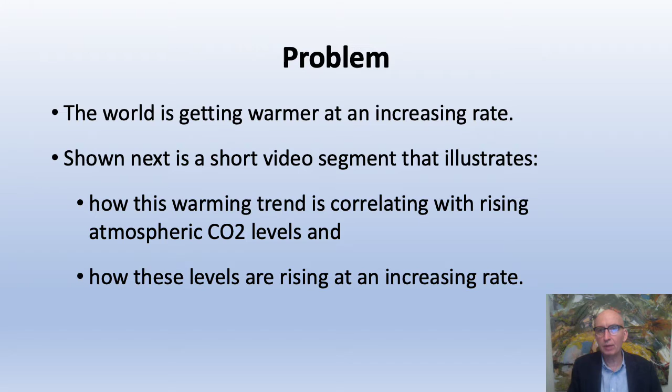The world is getting warmer at an increasing rate. Shown next is a short video segment that illustrates how the warming trend is correlating with rising atmospheric CO2 levels and that these levels are continuing to rise at an increasing rate.

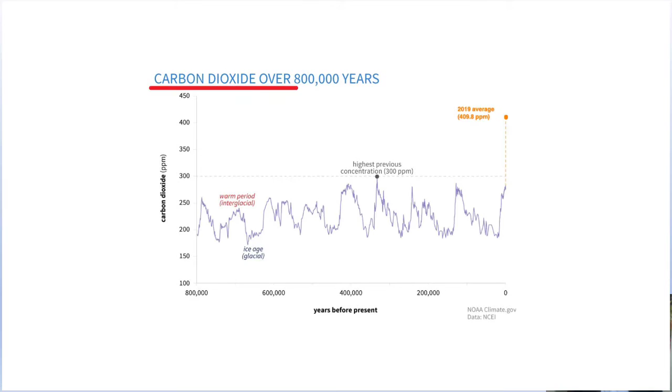The world is getting warmer and at an increasing rate. A large reason for this is CO2 levels in the atmosphere. Since the beginning of the Industrial Revolution, they have risen at an unprecedented rate. Rising CO2 levels have been correlating closely with rising global temperatures since 1880.

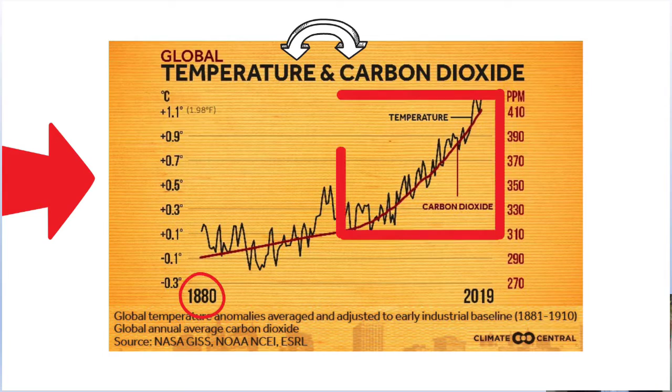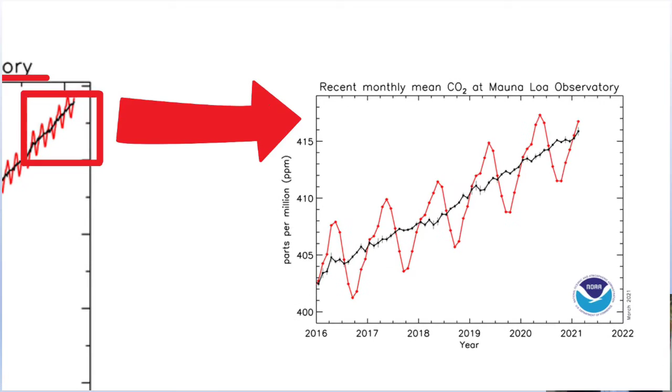This graph shows rising CO2 levels on a shorter timescale as measured at the Mauna Loa Observatory in Hawaii. On an even shorter timescale, you can see average CO2 levels have continued to rise despite a global economic slowdown from the coronavirus pandemic, which is shown by the black line. The red line on this graph shows the seasonal variations.

Why are these CO2 levels continuing to rise at an increasing rate? There are several factors contributing to these rising CO2 levels, but the main reason for this rise is that the total overall global energy demand appears to be increasing faster than the renewable energy generation growth rate.

Therefore, carbon emissions need to be mitigated on a much larger scale than what has been occurring. In addition to expanding carbon-free energy generating solutions as fast as possible, the world needs to implement carbon capture from existing fossil fuel energy sources on a very large scale.

Fortunately, there is now a proven breakthrough technology that captures 100% of the CO2 created when generating power from fuels such as natural gas, biogas from landfills, syngas from coal, and diesel fuel. It is called the Allam Cycle.

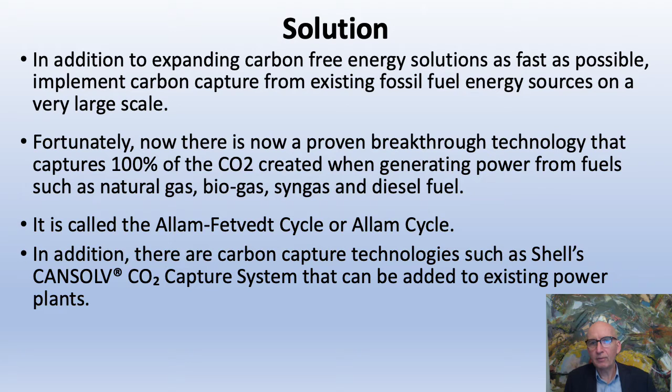In addition, there are additional carbon capture technologies such as Shell's CANSOLV CO2 capture system that can be added to existing power plants. The captured CO2 can be utilized for a wide range of uses, including vertical farming, as well as being sequestered in the ground.

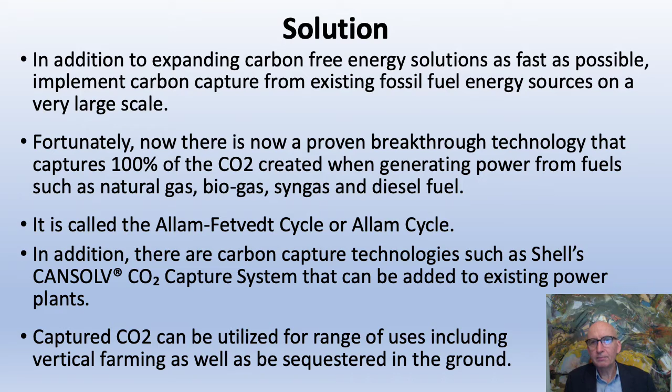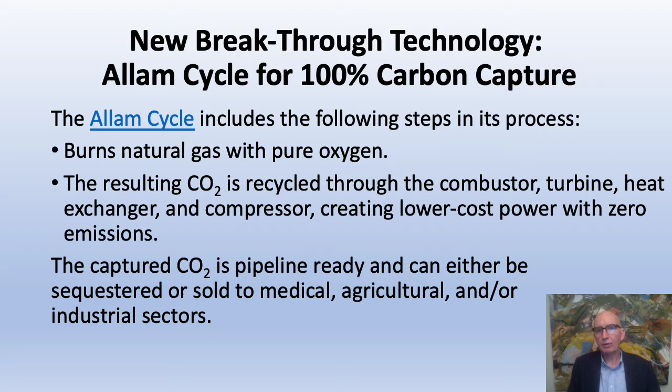The Allam cycle includes the following steps in its process. First, it burns natural gas with pure oxygen. Then the resulting CO2 is recycled through the combustor, turbine, heat exchanger, and compressor, creating relatively low-cost power with zero carbon emissions. The captured CO2 is pipeline ready and can be either sequestered or sold to medical, agricultural, or industrial sectors. The next slide is an animated video segment about a natural gas-fueled power plant that uses this cycle.

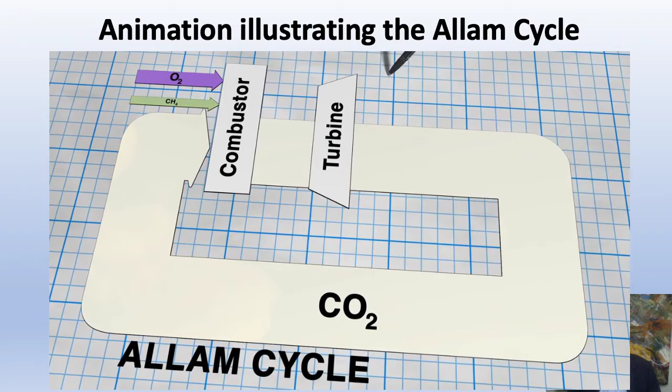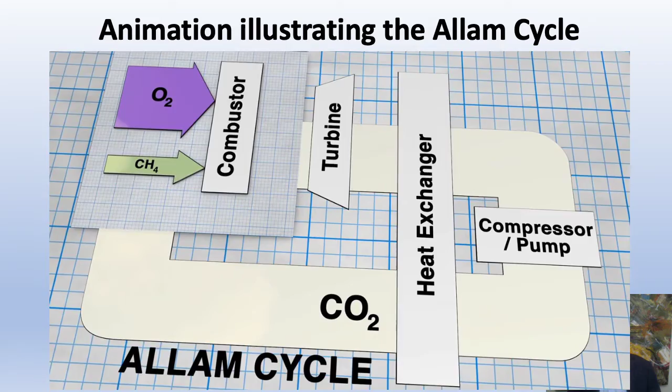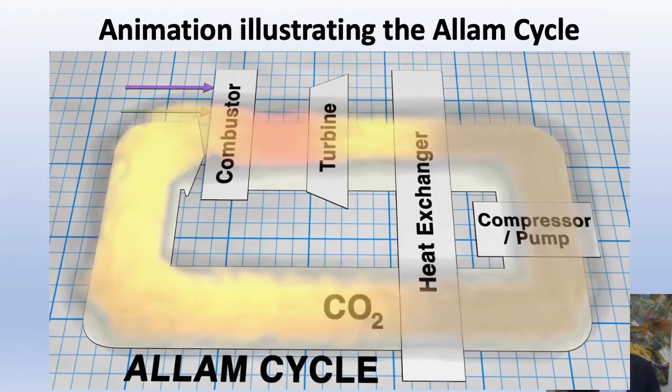Net Power uses supercritical CO2 instead of steam to produce power. Natural gas is combusted with hot, recuperated CO2 and oxygen, preventing NOx production. Burning with oxygen, known as oxycombustion, is typically uneconomic because oxygen is expensive to produce. Net Power overcomes this problem by recuperating the majority of the produced CO2 into the combustor, dramatically lowering oxygen requirements.

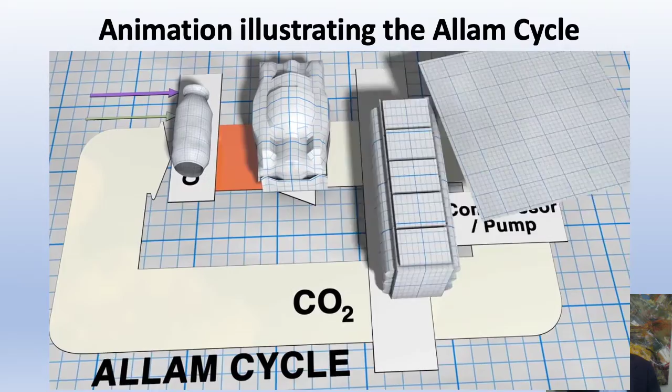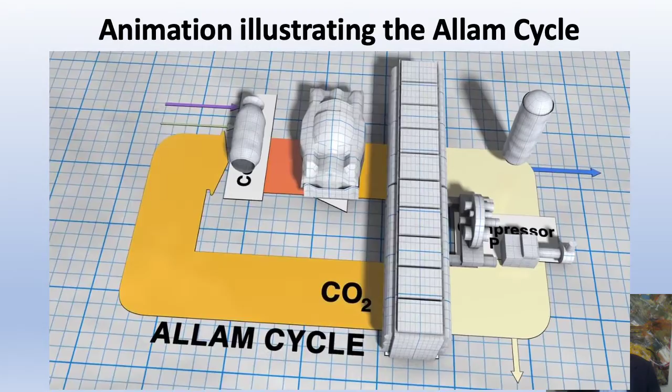The resulting working fluid of high-pressure CO2 and water is expanded through a turbine and then cooled in a heat exchanger. Water is removed, and the remaining nearly pure carbon dioxide stream is compressed and pumped back to high pressure. Excess pipeline-ready CO2 is exported before the working fluid is reheated in the heat exchanger and returned to the combustor. This breakthrough process produces low-cost electricity, eliminates water consumption, and is emissions-free.

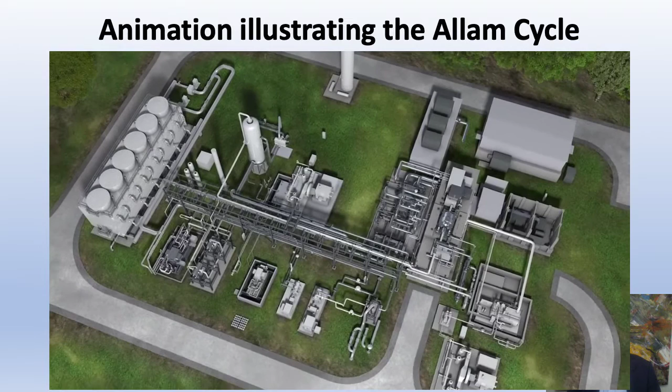The Allam cycle can be implemented on a global scale relatively quickly for several reasons. First, companies around the world can license this technology from Net Power, which is a privately held technology licensing company. The owners of this licensing company have considerable experience, capacity, and credibility in the power generation industry, which include Exelon Corporation, McDermott International Limited, and Occidental Petroleum, or Oxy.

Lastly, equipment manufacturers and contractors around the world that are currently supplying, constructing, and/or operating conventional power plants can also build and operate the Allam cycle power plants. Therefore, capacity exists for rapid large-scale implementation of this cycle starting now.

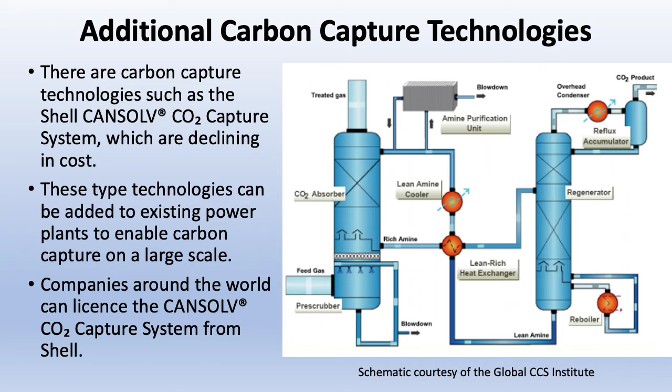As I mentioned earlier, there are carbon capture technologies such as Shell's CANSOLV CO2 capture system. This system is now in use in many locations and is declining in cost. It can be added to existing power plants to enable carbon capture on a large scale. In a similar way as the Allam technology can be utilized, companies around the world can license the CANSOLV system from Shell. Initially, CO2 captured from these power plants would be mostly sequestered in the ground.

However, once there is a reliable source of low-cost CO2 available, this CO2 can be used for many other uses, including accelerating plant growth in indoor farms, strengthening concrete building materials, and production of carbonated beverages. There are several sequestration options for CO2 captured from power plants. This includes injecting CO2 into oil and gas fields, into basaltic formations, and into salt caverns.

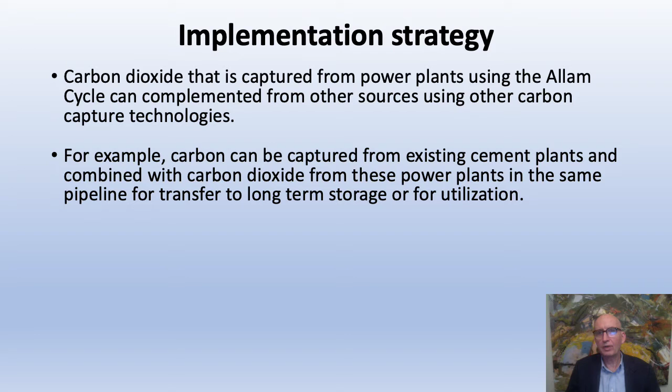Carbon dioxide captured from power plants using the Allam cycle can be complemented from other sources that use other carbon capture technologies. For example, carbon dioxide can be captured from existing cement plants and combined with carbon dioxide from power plants in the same pipeline for transfer to long-term storage or for utilization.

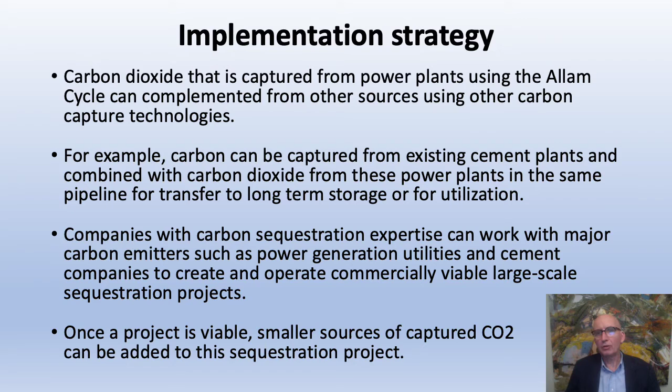Companies with sequestration expertise can engage with major carbon emitters such as power generation utilities and cement manufacturing companies to create and operate commercially viable large-scale sequestration projects. Once a project is viable, smaller sources of captured CO2 can be added to this sequestration project.

Power plants combined with carbon capture can help make an electricity grid that is also powered by renewable energy farms more reliable. For example, if wind power is not available for a few days, these power plants can provide the needed electricity. Since a power plant using the Allam cycle is very efficient and captures 100% of the carbon dioxide created, it can also be used during low demand periods to power direct air capture of carbon dioxide from the atmosphere. If this was done, this power plant would have a significant negative carbon footprint.

There are some impressive new technologies becoming available to enable low-cost carbon capture from the outside air. For example, Carbon Engineering has developed an effective way of doing this and has made considerable progress in reducing the operating cost of this process.

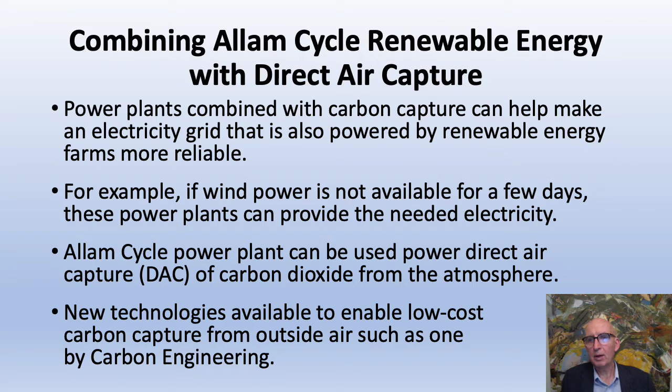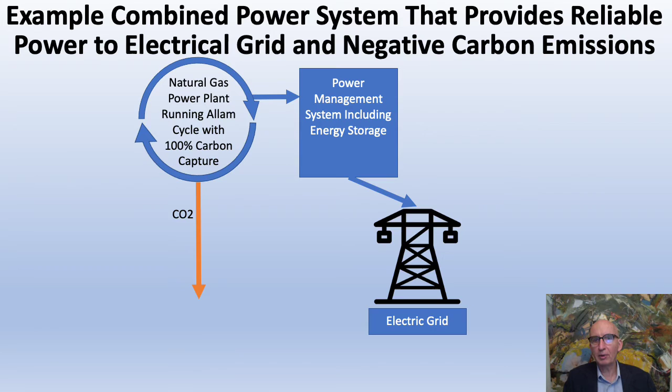Shown here is an example of a combined power system for maximum reliability with negative carbon emissions. The natural gas power plant running the Allam cycle enables 100% carbon capture and delivers power to the power management system. This power management system is also supplied with electricity from wind and solar farms. To help manage the power more effectively, this power management system includes energy storage to manage short-term power peaks and shortfalls.

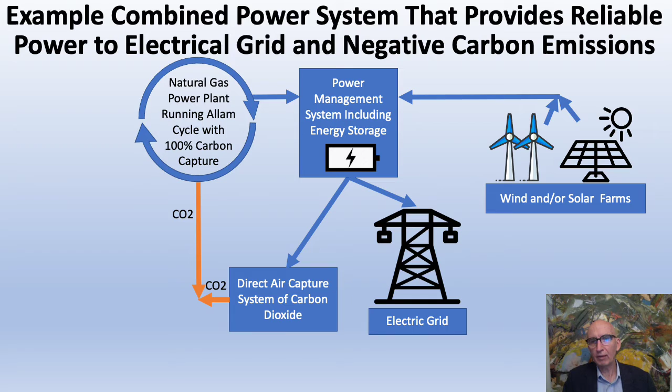If a substantial amount of power is reduced for a long period of time, such as if there is no wind power for a few days, the power management system reduces the power to the direct air capture system of carbon dioxide. In this way, the power management system can maximize the reliability of the power to the electric grid. The carbon dioxide that is captured from the power plant or direct air capture system can be utilized in beneficial ways such as accelerating growth of food in a vertical farm or be sequestered in the ground.

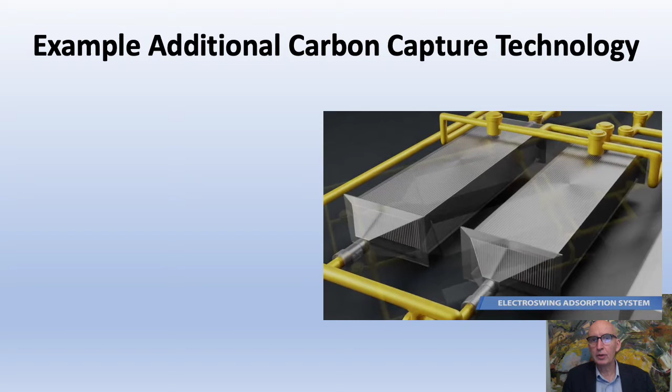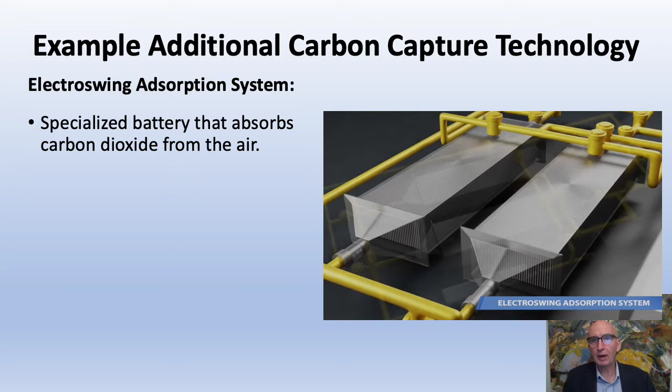There are several other carbon dioxide capture systems available or under development. Shown here is a very promising one called the Electroswing adsorption system that is being developed by MIT. It is essentially a large specialized battery that absorbs carbon dioxide from the air or other gas stream passing over its electrodes as it is being charged up, and then releases the gas as it is being discharged.

In operation, the device would simply alternate between charging and discharging, with feed gas being blown into the system during the charging cycle and then pure concentrated carbon dioxide released during the discharging cycle.

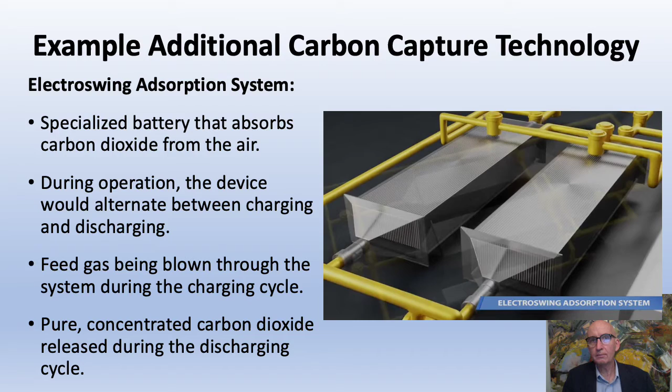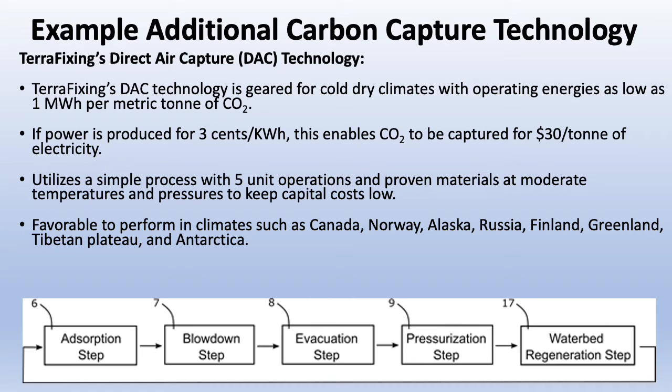It utilizes a simple process with 5 unit operations and proven materials at moderate temperatures and pressures to keep capital costs low. There are several areas in the world where it can operate this efficiently, including Canada, Norway, Alaska, Russia, Finland, Greenland, the Tibetan Plateau, and Antarctica. Below is an illustration of its cycle for capturing and concentrating CO2 from the ambient air.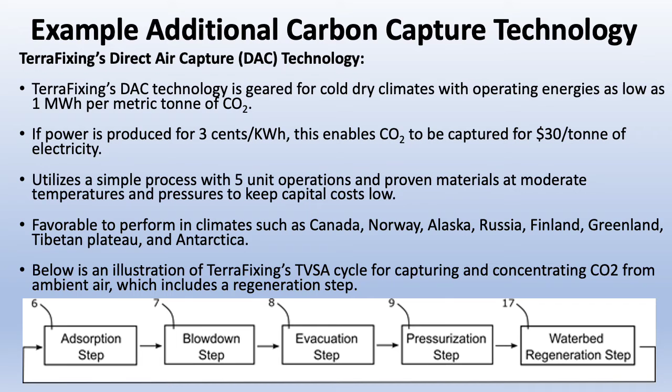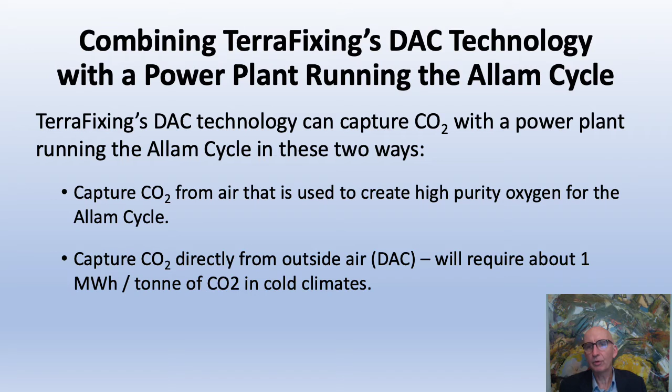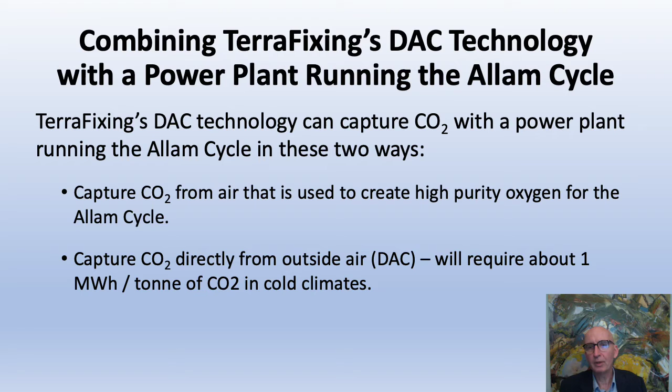TerraFixing's DAC technology can capture CO2 with a power plant running the Allam cycle in these two ways. First, capture CO2 from the air that is used to create the needed high-purity oxygen to operate the Allam cycle. This can be done very efficiently since it would be integrated with the process to create this high-purity oxygen. Second, capture the CO2 through the normal DAC process. As indicated earlier, this process will require only about 1 megawatt-hour per metric ton of CO2 captured when done in cold climates, which is very economical.

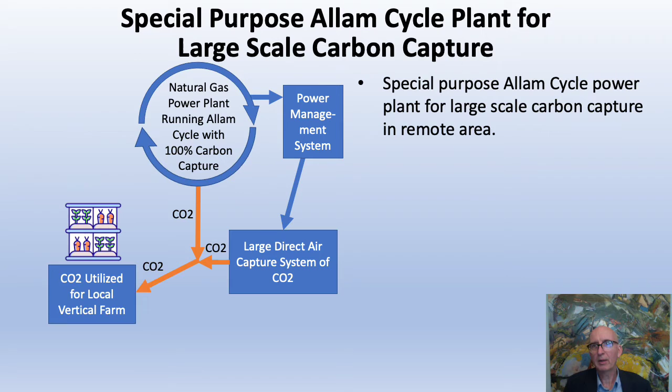Shown here is a special-purpose Allam cycle power plant configured for large-scale carbon capture. Along with carbon capture, this plant also enables enhanced natural gas recovery from a gas field, which would then be completely consumed by this plant. Therefore, no carbon emissions would occur from this closed-loop process. A 300 megawatt power plant is estimated to be able to power the capturing of approximately 7,200 metric tons of CO2 per day, which translates into about 2.6 million metric tons of CO2 per year.

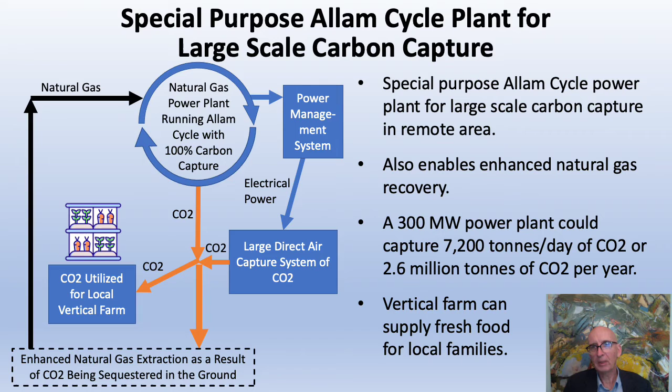As an added bonus, a vertical farm can be included to supply fresh organic food to feed the local families. The net result of this type of special purpose power plant would effectively be millions of tons of negative carbon emissions.

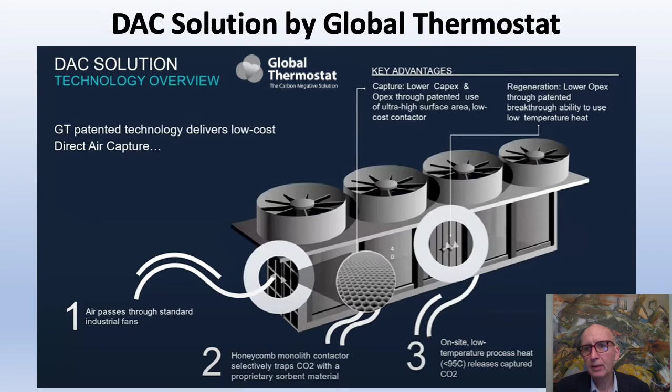Another very promising direct air capture or DAC solution is one by Global Thermostat. Their basic version captures CO2 in a honeycomb contactor via their proprietary sorbent material. Then they use a low temperature process heat in the range of 80 to 100 degrees C to release the captured CO2.

The plus version of their solution, which is called DAC-Plus, has a very important added feature. It can cost-effectively capture CO2 from both the outside air and a natural gas power plant. It does so in these three simple steps. First, a DAC module starts its cycle by capturing CO2 from the outside air.

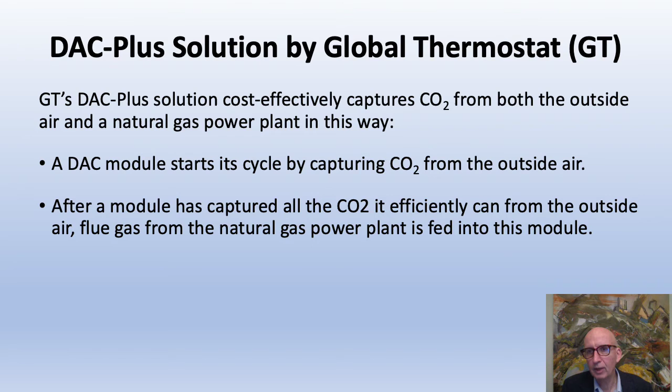After this module has captured all the CO2 it efficiently can from the outside air, flue gas from the natural gas power plant is fed into this module. Once the module has captured all the CO2 it efficiently can from the flue gas, it is then recharged using low temperature process heat. Then this cycle is started over again.

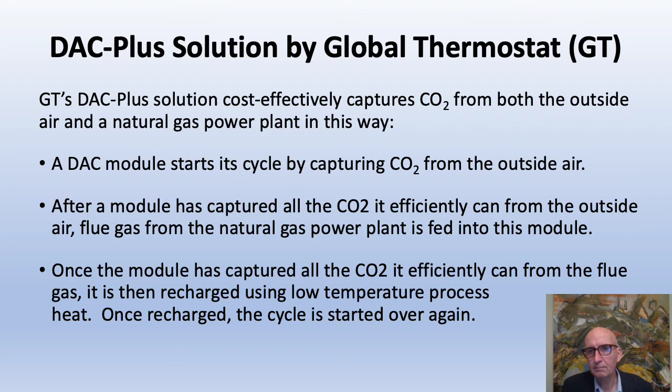The net result of this DAC-Plus solution is that it can effectively capture CO2 from both the outside air and its natural gas-fueled energy source without the need of a plant running the Allam cycle. Therefore, this solution can be widely deployed relatively quickly on a global scale as a negative emissions power plant.

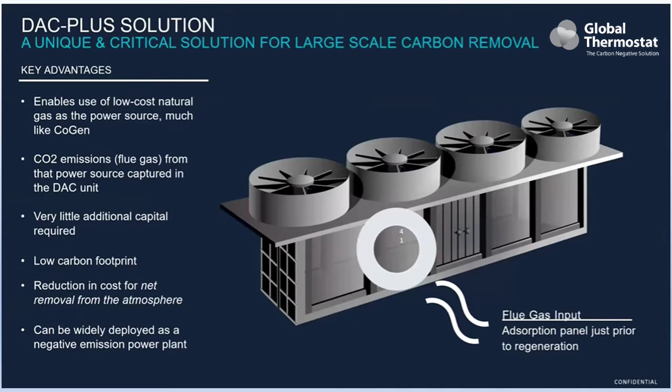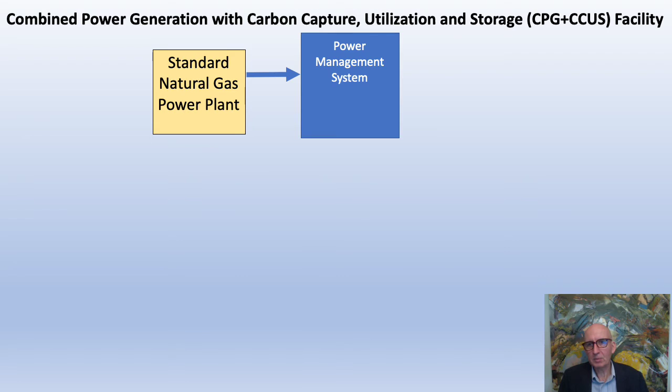Shown here is an example of a combined power system designed for maximum reliability with negative carbon emissions. The natural gas power plant delivers power to the power management system. This power management system is supplied with electricity from wind and solar farms.

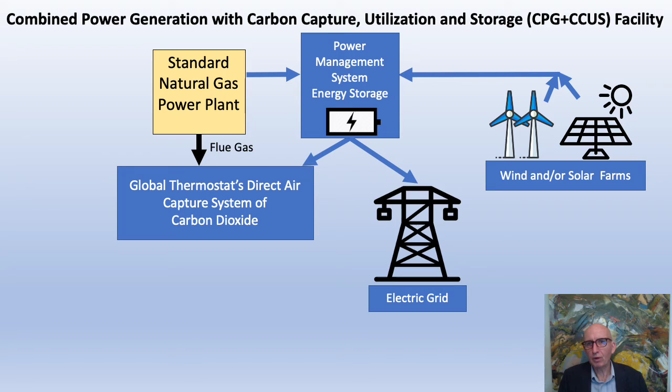To help manage the power more effectively, this power management system includes energy storage to manage short-term power peaks and shortfalls. If a substantial amount of power is reduced for a longer period of time, such as if there is no wind power for a few days, the power management system reduces power to the direct air capture system of CO2. In this way, the power management system can maximize the reliability of power to the electric grid.

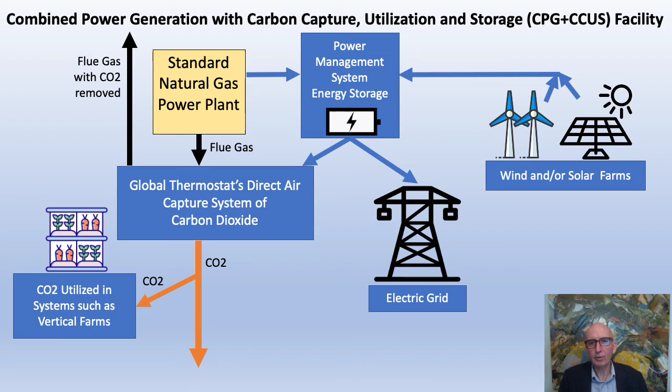The carbon dioxide that is captured from the power plant and direct air capture system can be utilized in beneficial ways such as accelerating growth of food in a vertical farm or sequestered in the ground.

If these types of combined power and carbon capture systems were implemented in thousands of locations around the world, the scale of the impact on reducing carbon emissions would be extremely large, likely in the range of billions of tons of CO2 per year. Green bonds, which are growing quickly and totaled more than $295 billion last year, can be an effective way to finance these combined power systems.

Shown next is a simplified flowchart illustrating how projects using these types of combined systems can be financed. Typically, green bonds are issued once a project is operational and generating income, so bridge financing is normally needed to construct and commission these combined power systems.

This bridge financing normally includes at least two components. The first is the equity component that is provided by the owners of the project and the respective investors. The second component is a bank loan by one or more financing institutions like the Canada Infrastructure Bank.

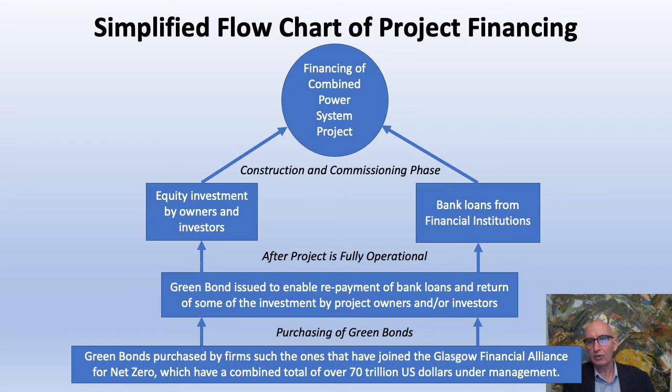When the green bonds are issued to repay the bridge financing, they can be promoted to financial firms that are likely buyers of these bonds, such as the firms that have joined the Glasgow Financial Alliance for Net Zero, which have a combined total of over $70 trillion under management. Therefore, there are existing financial mechanisms and capital available to finance a large-scale implementation of these combined power systems around the world.

In addition to the Glasgow Financial Alliance for Net Zero, there are other climate finance initiatives that include firms that would likely purchase green bonds to finance these types of combined power systems. For example, there is the Institutional Investors Group on Climate Change, which includes firms that have over $54 trillion in assets under management. Secondly, there is the Climate Action 100 Plus initiative, which includes firms with over $35 trillion in assets under management.

And finally, the Coalition for the International Platform for Climate Finance, which includes firms with over $7 trillion in US assets under management. Please note that some of the financial firms that are members of one climate finance initiative listed here may also be members of other initiatives that are also listed here.

It should be noted that green bonds are financing mechanisms for established and rated borrowers that have projects meeting specific environmental attributes. Therefore, a relatively new project developer seeking to utilize green bonds may need to partner with a larger company or government entity that is considered established and has an adequate credit rating.

Many companies are now facilitating issuance of green bonds. To view a list of some of these companies doing this work, visit climatebonds.net/partners. On the next slide, I will outline steps to issue a green bond that has been suggested by Sustainalytics, which is a Morningstar company.

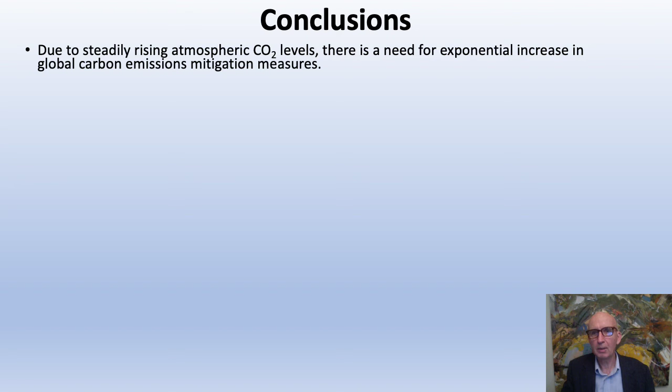In conclusion, due to steadily rising atmospheric CO2 levels, there is a need for exponential increase in global carbon emissions mitigation measures. There is now a proven breakthrough technology that captures 100% of the CO2 created when generating power from fuels such as natural gas, biogas, syngas, and diesel fuel. It is called the Allam Cycle.

In addition, there is direct air capture, or DAC, technology such as TerraFixing and Global Thermostat that can cost-effectively remove CO2 from the outside air. The CO2 captured can be used for a range of uses, including vertical farming, as well as being sequestered in the ground.

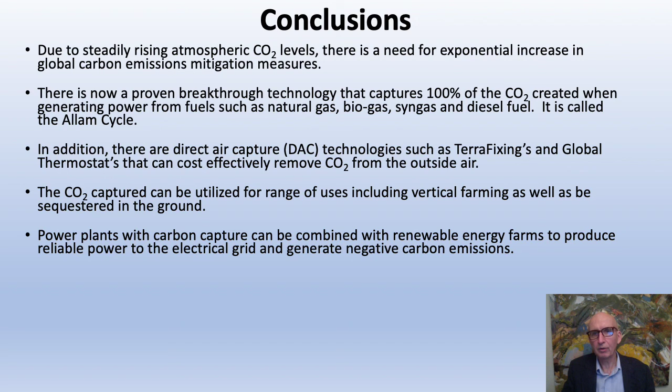Power plants with carbon capture can be combined with renewable energy farms to produce reliable power to the electric grid and generate negative carbon emissions.

This solution can be financed on a global scale with green bonds that are purchased by firms that have joined the Glasgow Financial Alliance for Net Zero, which have a combined total of over $70 trillion under management.

This solution helps governments, companies, and workers that depend on income from fossil fuels to transition to a low-carbon economy, which is critical for their support.

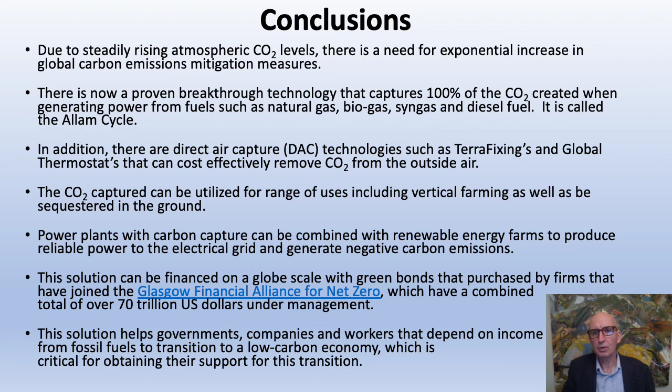To help catalyze the implementation of this opportunity on a global scale, we recommend the following. First, invite independent groups such as Drawdown and the Center for Climate and Energy Solutions to work together to estimate the full potential impact of implementing this opportunity on a global scale.

Since organizations like IEA have already estimated the potential impact of some carbon capture technologies, this estimate can build on work already completed and take into account the latest technologies and strategies to accelerate carbon capture and storage globally.

Second, inform companies in the oil, gas, power plant, solar energy, wind energy, and energy storage sectors about this opportunity, which can bring them many billions of dollars of funding.

Third, inform financial institutions that facilitate the issuance of green bonds of this opportunity, which will likely enable them to generate hundreds of millions of dollars in fees doing this work.

Lastly, respond to the recently published concerns about carbon capture, utilization, and storage by about 500 organizations to help build broad-based support to implement this opportunity on a global scale.